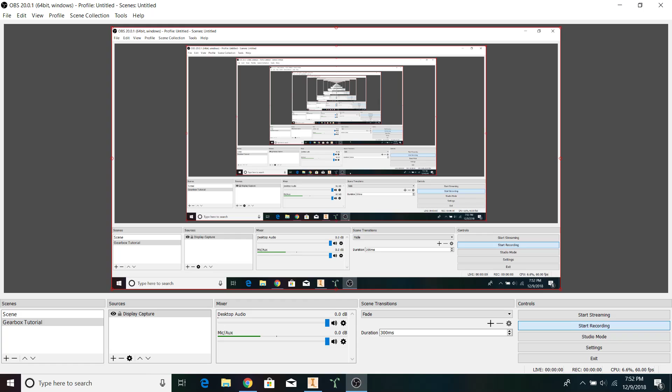Hi guys, today I'm going to be explaining how to make an FRC style gearbox for a FIRST Robotics Competition drivetrain. Alright, I think the best way to understand how to go about making this gearbox is to first take a look at an example.

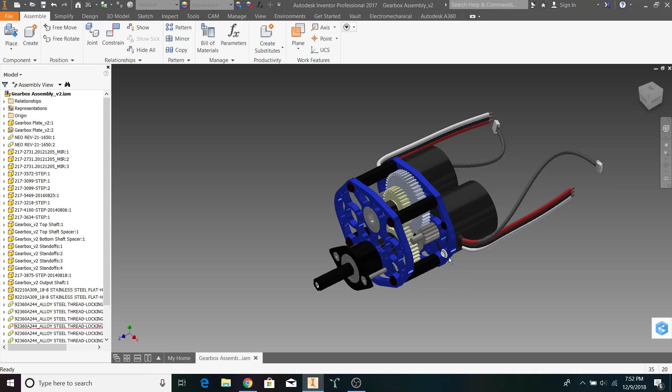Now, in this example, you can see that we have two motors in the back connected to a set of gears in the middle. Now, the reason that we have the motors connecting to a set of gears is so you have more control over the speed of your drivetrain, and so there's more torque. That torque will be able to, one, move the weight of your own robot, as well as pushing other robots.

Now, this set of gears is connected in a way that there's two stages. Our first stage is going to be connected from here to here, and our second stage is going to be the gear set here and here.

In order to assemble this gearbox, the first step we have to take is making the front and back plates. The front and back plates are going to define the mounting holes for our motors, where our output shafts are, and where our gears sit. In order to begin making these plates, we need to figure out what gears we're going to be using at what reduction. So we're going to begin this by going ahead and opening up the JVN Design Calculator.

Now, the JVN Design Calculator is going to help us figure out what numbers we need to get the speed we want. So near the bottom, you'll see we have a lot of options. Today we'll be focusing on making a custom 1-speed drive. So go ahead and go to custom 1-speed drive. You'll notice that these are the options we have here. Now, for the top box, you should have exactly the same amount of information I have. All of the numbers should match up.

We will be putting 2 gearboxes in our drivetrain, 2 motors per gearbox. The total weight of our robot is going to be 154 pounds. This accounts for the 120 pound limit for the robot itself, as well as the maximum of 34 pounds for the bumpers. Our wheel diameter for this drivetrain is going to be 4 inches.

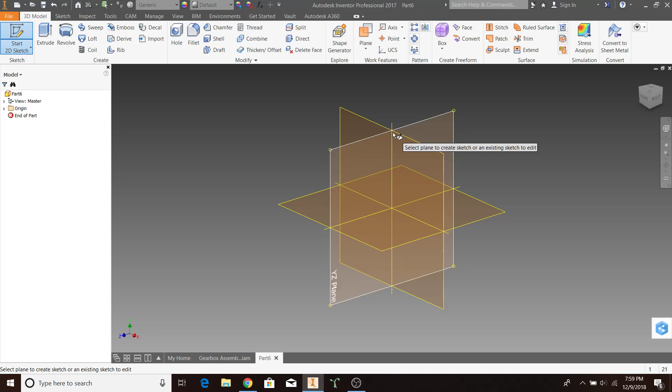The first thing we're going to start with is our 12-tooth gear. Now you'll notice that on Vex websites, they provide both 20 DP gears and 32 DP gears. Right here, 32 DP gears. Now, DP refers to the diametral pitch, which is essentially the amount of teeth per inch on the gear. 32 DP indicates there'll be more teeth per inch versus a 20 DP gear.

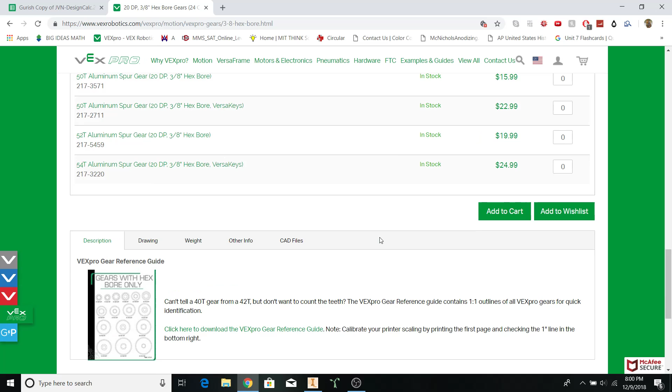So when I'm making my layout sketch, I want to make the layout sketch showing how the gears connect. If I open up any drawing of any gear on VexPro's website, right here, it'll give you a few different numbers. It gives you the outer diameter and the pitch diameter. The pitch diameter refers to where the teeth mesh.

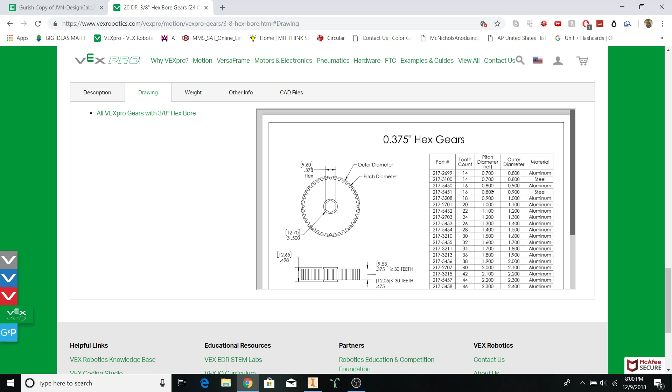Let's take a look at the numbers in the table. The tooth count is 14 and the pitch diameter is 0.7. Over here, the tooth count is 32 and the pitch diameter is 1.6. You can clearly see that in order to achieve the pitch diameter, they have divided the tooth count by 20, which is in fact the diametral pitch right here.

So when we're in Autodesk Inventor and we're illustrating the gearbox layout sketch, we're going to start by doing 12 divided by 20. The 12 indicates the number of teeth on the gear and the 20 indicates the diametral pitch. This will give us the overall pitch diameter for the gear.

Now, right now we're going to make this gear in construction. The reason we're putting this in construction is because this is not going to be a final product of the plate. This will not make a hole or anything. This is just representing where the gear is going to be located. Alright, we know there's going to be 2 motors on our gearbox, so let's add another one on the x-axis.

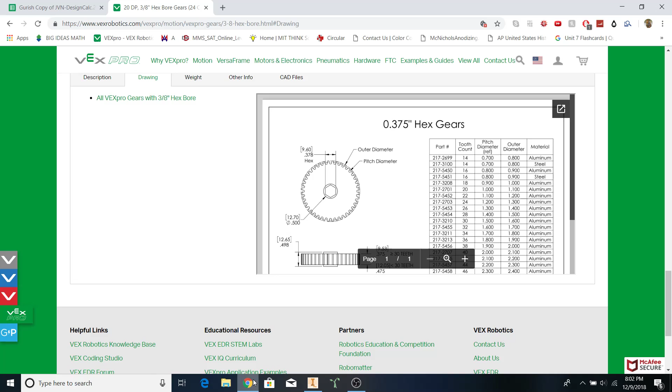This one can also be set in construction. Alright, now that we've made 2 of our gears, let's get on to the second gear. Our second gear is going to be this 42-tooth gear. As you can see in this example gearbox, these two are going to connect in this fashion.

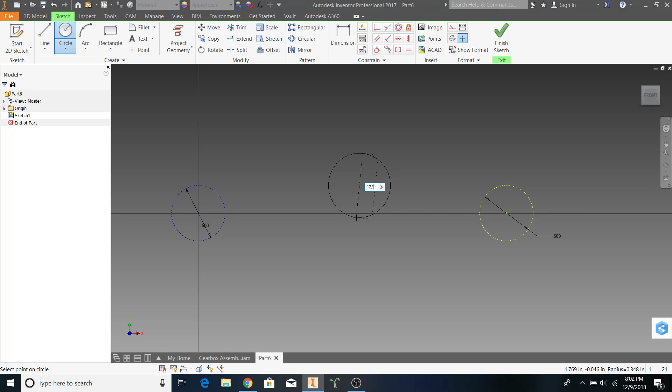For now, I am not going to make the gear on the x-axis because Autodesk Inventor will cause it to lock automatically. I'll be making it slightly above. So I'm going to take the number of teeth again and divide by 20. Let's put this in construction. Alright, now we know that these are the first set of gears we'll be using. Since these are showing the pitch diameters, we can make them tangent because that's where the gears are going to mesh.

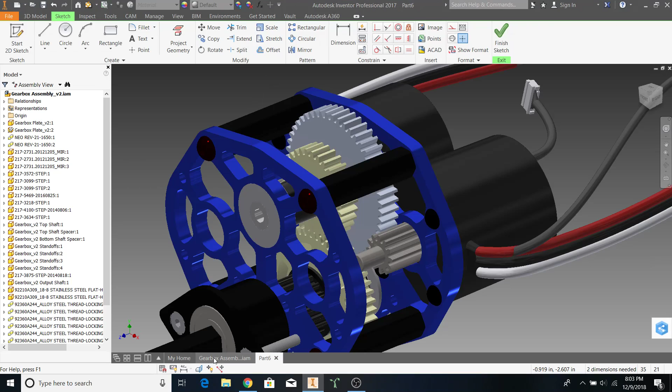Alright, the next thing we need to do is make our next set of gears. Now in this example, you can see that the next gear is on the same shaft as the first gear. Just following the set of gears, you can see how this would work. These two are at a 1-to-1 ratio. Essentially, this gear is traveling at the same speed as this gear. And then this causes a reduction on the bottom shaft when it interacts with this gear.

In our JVN Design Calculator, we can see that our third gear is going to be a 30-tooth gear. So back to our drawing. I'm going to make a 30-tooth gear right on top of this one. Construction, once again. And that's the beginning of our second stage.

Now the last gear that we need is this 50-tooth driven gear. This 50-tooth driven gear is going to be on a different shaft entirely, as shown by this gearbox. It's going to be on the bottom shaft. So, somewhere, just make an arbitrary circle that's 50 divided by 20. Construction, once again. This gear is going to be connected to this gear, so we can make these two tangent.

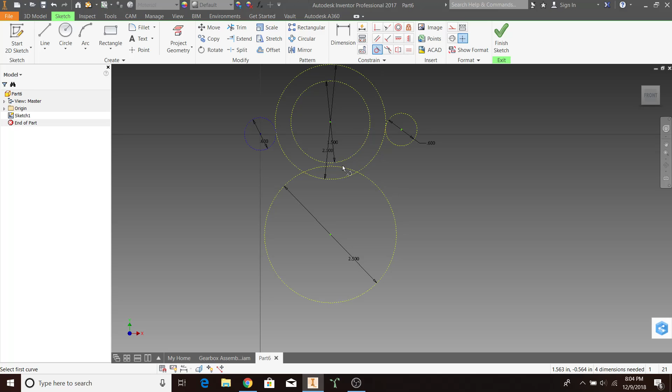Alright, now you can see that Inventor has made these gears yellow as to illustrate that they're not fully constrained. Let's add a few constraints to them. We want the gearbox to be pretty symmetrical, so we can connect these two gears with a straight line in construction and make it perfectly vertical. Alright, now you can see that this gear is wanting to move around as well. Let's connect it to the gear at the origin.

And for me, it's made it perfectly horizontal automatically, but if you need to, you can use the horizontal constraint right here. Alright, let's take a look at what else is moving. This gear is still moving up and down. Alright, before we add more constraints to it, let's add a few different items to our gearbox. First, let's outline the first motor.

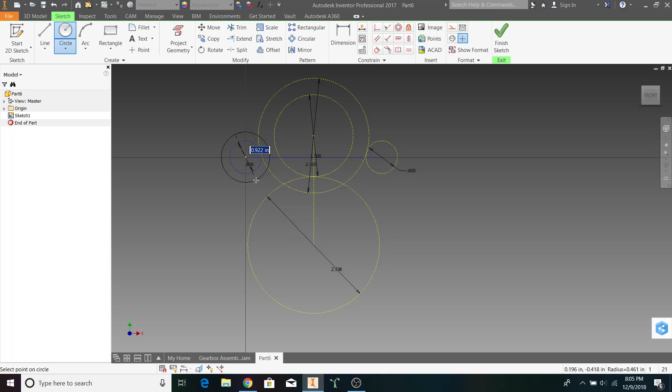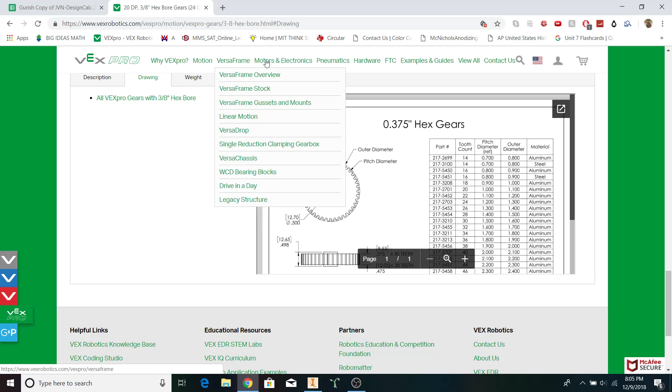For CIM motors, the outer diameter is going to be 2.52. But in order to adjust for tolerances, we'll be changing this number to 2.56. If you want to confirm this number, you can go to the VexPro website, Motors and Electronics, CIM Motor, just scroll down to the drawing. Alright, right here you can see that the outer diameter of the motor is 2.52, I believe. Alright, 2.52, right here. So I increased it by 0.04, which will be more than enough to adjust for tolerances and space when mounting.

Alright, now that these have been adjusted for tolerances, let's make this gearbox as compact as possible. Let's make this motor tangent to this one. Now, since these motors are not representing anything on our gearbox plate, we can make them in construction. Alright, now that we've got the overall layout for our gearbox, and all of our items are in blue, indicating they're fully constrained, we can go about creating mounting holes for everything.

So the first set of mounting holes we can focus on is the motor. On Vex's website, you can clearly see that the bolt circle is a 2-inch circle, and that our bolt holes are for 10-32 bolts. So let's go ahead and make a 2-inch bolt circle on each of the motors and put them in construction.

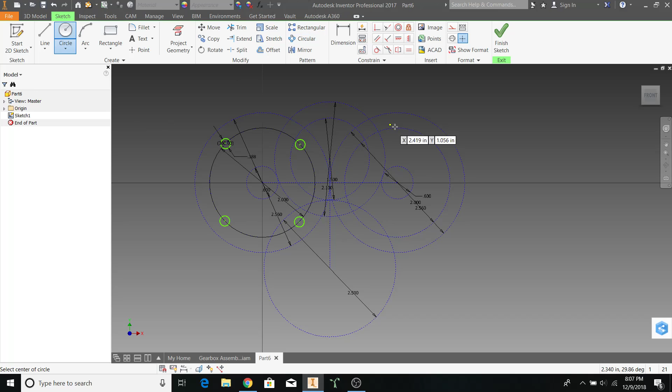Alright, now we need to add the bolt holes themselves. In order to ensure that they're perfectly 180 degrees apart, we'll be using the circular pattern tool. I'm going to be making it 4 holes just in case we need to adjust the motors for some reason during mounting. Same thing applies to the other side. The bolt hole is 3/16, indicating a number 10 bolt. And we'll be circular patterning this around.

Alright. The circles right now are in green, indicating they're not fully constrained. I'll be constraining them to show that they're going to be perfectly aligned. You may want to leave them moving around for later adjustment, but for now this will be what I'm doing.

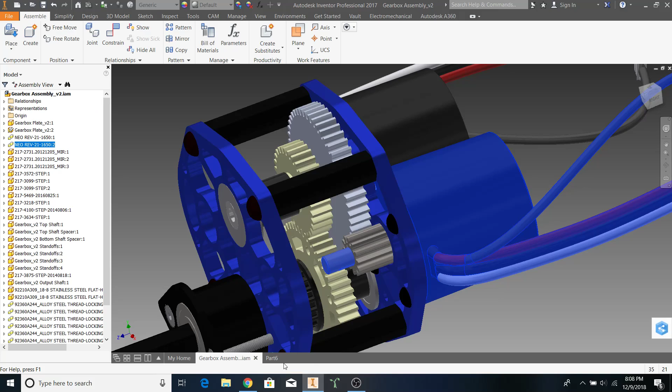Alright. The next hole we need to add is the hole that allows the hub of the motor to enter the plate. This hub can be seen in this drawing right here. This hub, as detailed by the drawing, is 0.75 inches in diameter. So when we make it on our gearbox plate, to adjust for tolerances once again, we're going to make it 0.76.

Alright, the next thing we need to make is the bearing hole on our top gear. Bearings are all 1.125 inches for flange gearbox bearings, 1.125. Now, thank God we made the drawing first. We can clearly see that the mounting hole here is interfering with the bearing here. This is perfectly okay since we've already used these 2 bolt holes. When we mount it, we can see that we'll be using these 2 versus these 2.

Since we know that, let's adjust the mounting holes to make them more concise. I'll be deleting the pattern, delete pattern, deleting the line, and moving the mounting holes so they're perfectly vertical with each other. Let's circular pattern this. And this one. For now, I will actually leave them unconstrained as to allow for any later adjustment I may need to make to the mounting holes.

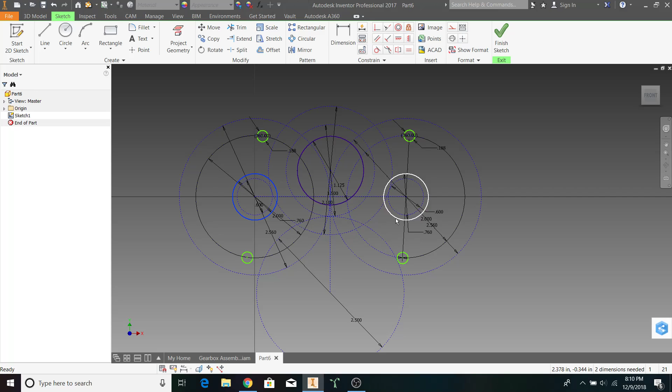Alright, now we've had our top bearing hole made, our holes for the hubs. Now we need to make the bottom one. The bottom one will also be a 1.125 inch bearing hole.

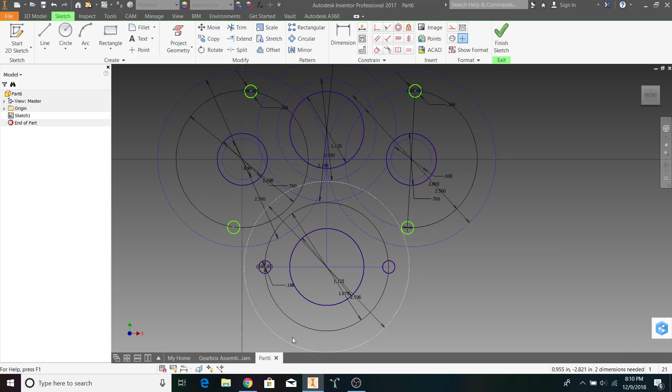The last thing we need to make is how this gearbox mounts to the drivetrain. In order to standardize any mounting we do on our team, we'll be using a 1.875 inch bolt hole in construction and put 3/16 bolt holes on the sides. These will be perfectly 180 degrees around. In a video later, I'll be explaining how these bolt holes also interact with the bearing block we'll be putting in. The bearing block refers to this piece right here.

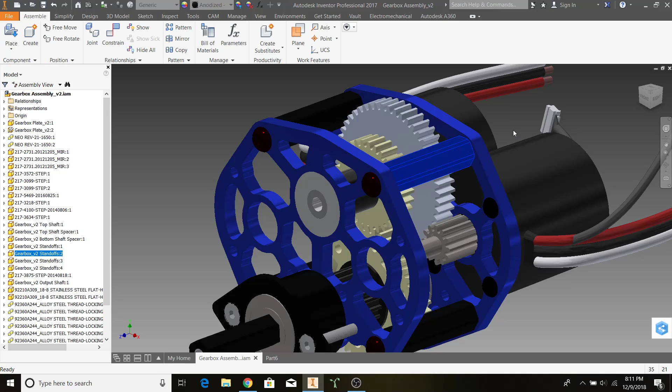Alright. The last thing we need to make on our gearbox is our standoffs. Our standoffs are what separate the front plate, right here, from the back plate here. You can see in this situation we've used ThunderHex shafts in order to make our standoffs. So our standoffs in our drawing, we can place one here, here, here, and here. Let's go about doing that.

The first thing we need to know is that the hole in our standoffs is going to be 0.25 inches. Now, we cannot just place the hole over here, because you can clearly see if the hole was there, the standoff would run into our gears. In order to adjust for this, we'll be making the outside of the standoff. The outside of a standoff is going to be 0.6 inches in diameter.

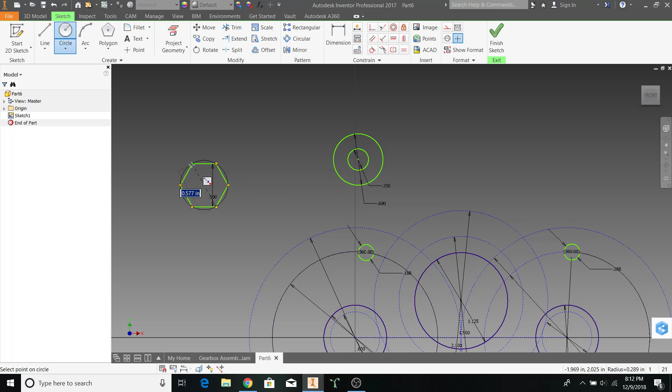In order to illustrate where I got this number from, let me give you a quick demonstration. A ThunderHex shaft is 0.5 inches in width. If I put a circle over this shaft, you can see that going from corner to corner gives me 0.577 inches. Correct? So what we're going to do is make a circle around this at 0.6 inches, again leaving room for tolerances.

Now we can make the 0.6-inch circle in construction and make them tangent with the objects that are already inside our gearbox. Let's repeat this process 3 more times. The reason we use a 0.25-inch hole in the middle is because we will be using 1/4-20 bolts to secure our standoffs.

Now the one thing that we need to ensure is that our gearbox standoffs do not interfere with the chain that will be running around transmitting power to our other wheels. Right now I can make this outside circle tangent to the motor and gear here. If I do that, you can clearly see that if chain were to run from here to here and here to here, it would go around the standoff.

In some situations when making the gearbox, this is not possible. So instead of making it tangent to the motor and gear, you will have to adjust it, just so the chain does not hit the standoffs. For now, we got lucky, and the chain passes smoothly around it.

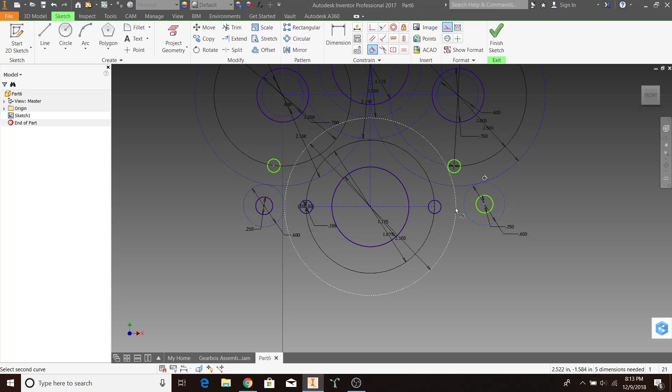Besides this, there are no other mounting holes we need for our gearbox. All of these other holes that you see in our plate are called pockets or lightening holes. These holes will essentially just reduce the weight while still providing a sturdy structure.

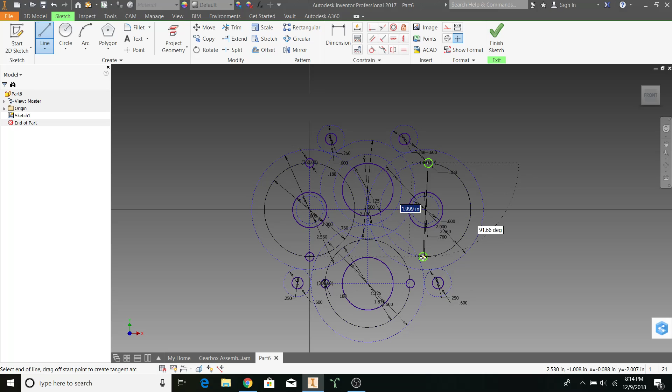Alright, the final thing we need to do is create the border of our gearbox. The border of the gearbox will keep everything in and actually give us the plate itself. Right now you can see that the motor holes are still unconstrained, so let's go ahead and straighten these out. I'm connecting them with a line, putting the line in construction, and making it perfectly vertical.

Alright, we now have the overall layout of our gearbox. Let's add a border. The border will be created by connecting lines and arcs. The lines will be made tangent to the outside pieces, and I'll be using the coincident constraint here to connect it from the edge of the line all the way to tangent to the circle. I'll be repeating this process for every line segment and every circle.

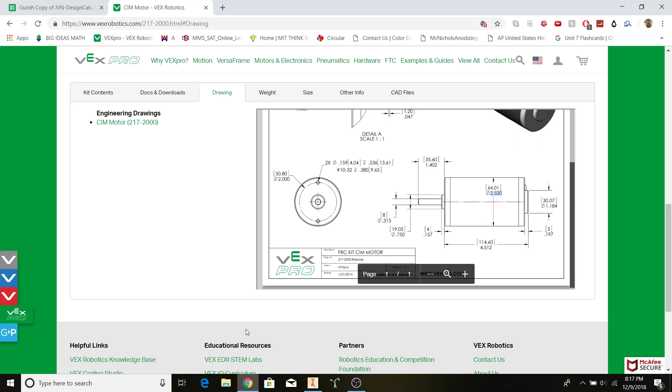Fantastic. Now before we extrude this gearbox, I want to show you why making a layout sketch like this is so beneficial. Let's say we go to our JVN Design Calculator and we decide to change some number. Let's say we want to decrease our speed from 16 feet per second to 14 feet per second. So we adjust the numbers around a little bit. It looks like this now.

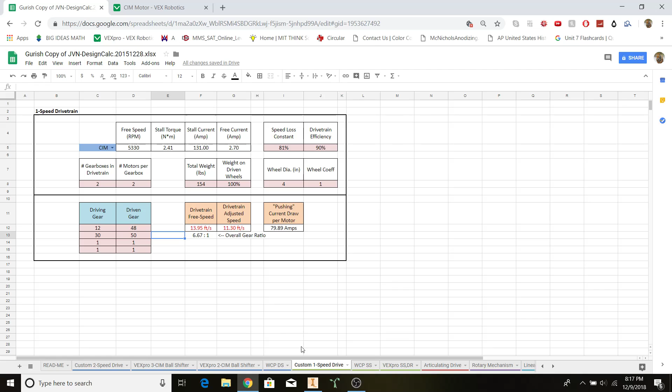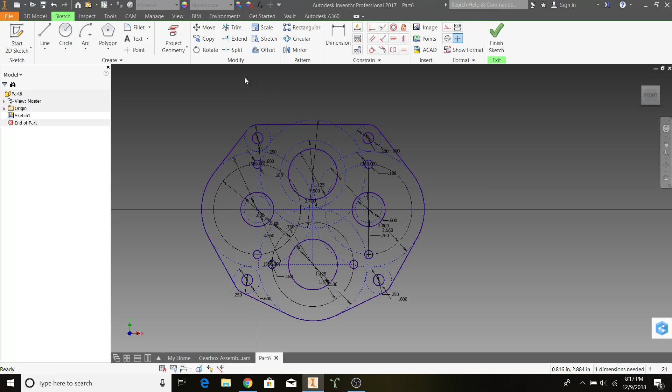What we can do is go back into our sketch. I can change my 42 tooth gear, which happens to be this one. Double click on the number, change 42 to 48, indicating a 48 tooth gear. Press enter. Voila. The gearbox automatically adjusts. The only thing you will have to do on your own is fill in the little gaps on the edges. But besides that, everything fits perfectly now. Let me just undo that real quick. Now let's finish the sketch and extrude our plate.

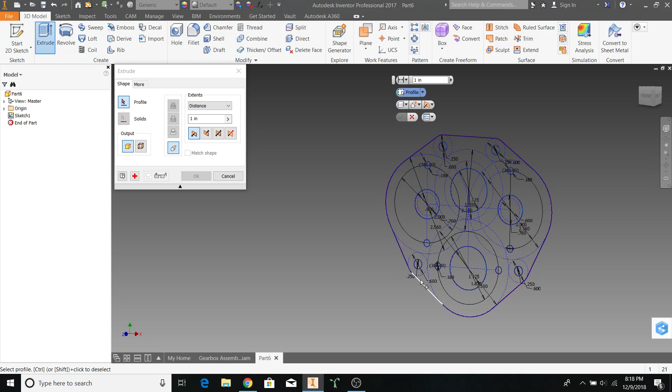Alright, now this is an issue that seems to come up a lot with students. This issue occurs because Autodesk Inventor is indicating that this is not a closed loop. Somewhere in the outside there is a gap. Let's diagnose this. We're going to edit the sketch first. Right click, Sketch Doctor, Diagnose Sketch. We'll be diagnosing open loops.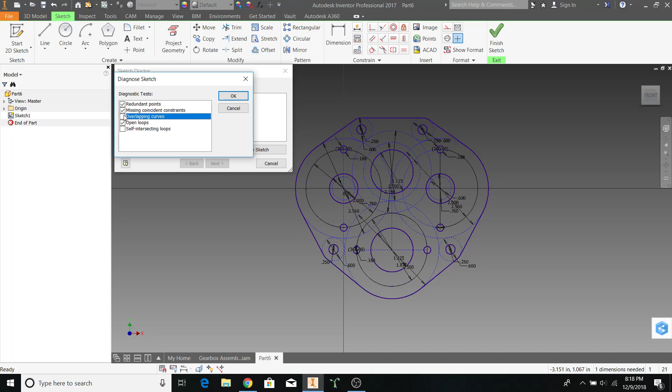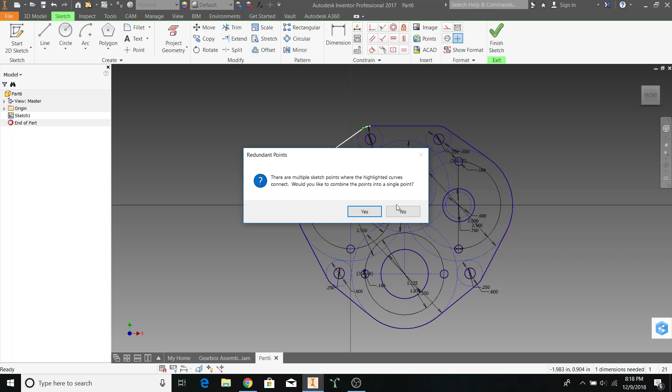Press OK. And right there, it's showing us that there is an open loop. Let's click Next. Open loop is in this profile, etc. Let's click Next. Close the loop. Finish. Let's just say yes. Successfully closed. Click OK. Now that point that was open before should be successfully closed. Finish the sketch. Extrude. And now we have a plate. We will be using 1/4 inch metal, so 0.25.

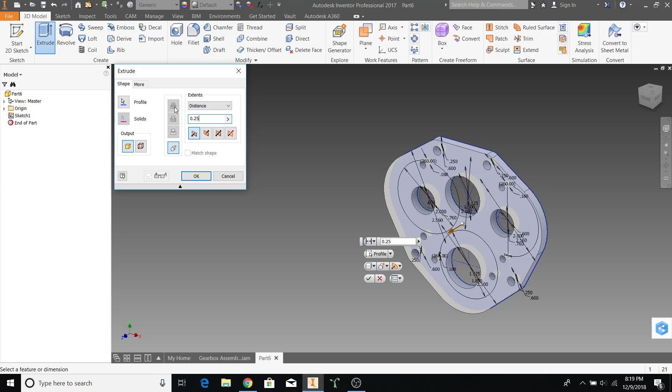Congratulations! You've now made a gearbox plate, which we can later implement in making this gearbox. Look forward to another video illustrating how this plate comes together to make the gearbox.